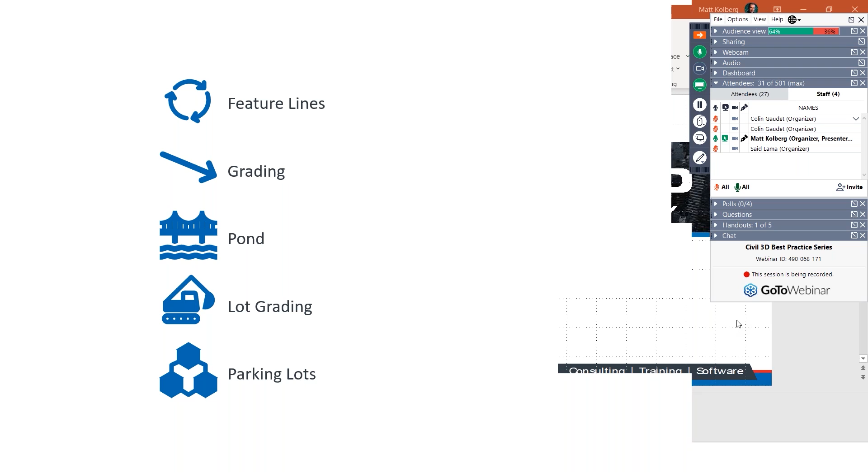All right, here we go. Come on, there we are. All right, we're already off to a poll here. We haven't even talked about anything yet, and we already have a poll. So you're going to see on your screen any second a question. Let me pick one here. Question is going to be, how much of your work is focused on grading, essentially? You'll see a bunch of options. All right, so I'll launch the poll now. So I just wanted to say, roughly how much your work is spent focused on grading tools, 0 to 20%, 20 to 40, you see the options. Just curious, how much grading do you do?

Give you a few seconds to finish up here. We have almost 50% of you have voted already. It's just about a tie between the second and third option. All right, 10 more seconds. Myself, when I was in production, I was probably in the 20 to 30% range as well. All right, 2/3 of you have voted, so a few more seconds.

Now, the first thing, I'm just going to get this right out of the way. Grading sort of has a bad rap with Civil 3D. If you go to the discussion group forum and you ask which Civil 3D tool is the least stable, you're going to get an overwhelming response: grading. Now, I don't want to say that it's unstable, but if you had to pick one, it's the one with the most potential for instability. Now, there's a couple things you can do to greatly increase your chances with grading.

And by the way, a lot of the bad rap from grading is from history. Back before 2010, yeah, grading was fairly unstable at times. It's improved immensely since then. And so a lot of the respondents to a question that you might ask in the discussion groups are the people who remember back then.

My friend Tish, her entire job is grading, and she almost never has a problem. So what does that tell you? Well, maybe she's not using the tools the way other people use the tools, or maybe she's using them in the best practices way. Anyway, there's things that you can do to increase your chances, and these two are the top two. Simplify your feature lines.

Now, what you're looking at, the dimension that says 21 meters, right? Look at the blue feature line underneath. Look how many vertices it has. I don't know how many there are. It's, I don't know, 1,000 vertices within 20 meters, and that's just way too much. We need to simplify those feature lines.

Okay, editing tools. The top left image there, that's all the editing tools we have. Typically what you want to do first, I'll switch over to Civil 3D here. So it's not PowerPoint death here. Let's try, come on. There we are.

Feature lines are the start of every grading scenario. In fact, a lot of grading scenarios don't even use the grading tools themselves. They don't use the criteria. Sometimes, maybe parking lots, it's just all about multiple feature lines, and there's your design.

There's two sort of buckets of editing tools that we place for feature lines. And typically you want to edit the geometry first. We want to edit the plan shape of this entity. That's almost always number one. Elevations almost always come after. I've got this sort of organic shape here, this blue feature line. If I want to make that a different shape, get rid of a PI or get rid of a curve or add a new PI.

All the geometry editing tools are right here. So I'm just going to do a couple really quick. Get rid of a point of intersection. Like that. Maybe I want to add a new point of intersection, such as this. Break, trim, join, right? AutoCAD has those tools, but AutoCAD doesn't know how to deal with feature lines. So you can't use the AutoCAD break, trim, and join tools. You have to use these tools.

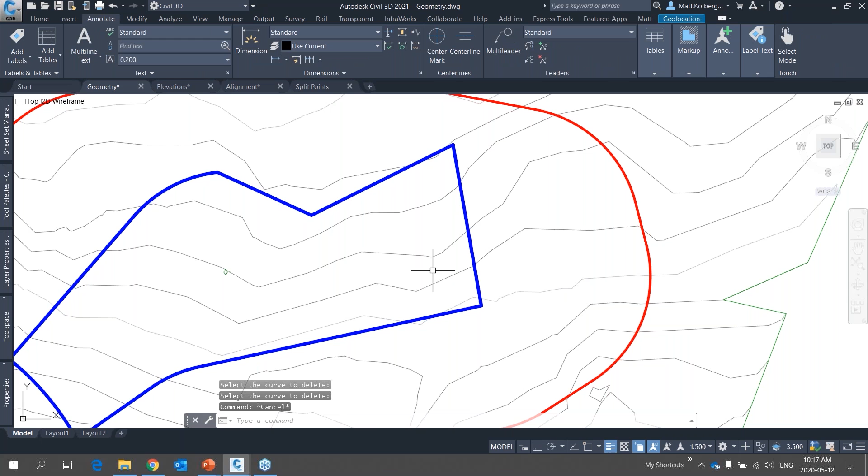And what they don't see is this. So they get the right button. They get the button to edit the curve, but they don't see that. So that delete, it's not trimming out that piece. It's just getting rid of the curve, and it makes it into a 90-degree angle, or close to 90 degrees in this case. So that's your tip of the day. That's how you get rid of a curve in a feature line.

So we start with the geometric editing tools. Get it the right shape. And then once it's the right shape, then we worry about the elevation tools. And then there's lots. The elevation editor is this sort of vista where you can highlight any number of points and apply their elevations all at once or individually with your mouse. You can use these tools to grade ahead or grade back. So if I want to hold this one vertex, I want to go at 5% in that direction, I can make that happen.

By the way, this is a new tool, newish. 2018, I think this tool was released. You can associate your feature line elevations to a surface, and you can make it dynamic. Right now, nothing's actually going on, but you can basically drape your feature line on a surface, but you don't have to drape it perfectly. You can have it floating above or below.

It's a relative elevation. A relative elevation of 0 drapes it perfectly on your surface. But a relative elevation of 1, your feature line is hovering 1 meter above the assigned surface, and when the assigned surface is edited, your feature line is edited. So that's a newish tool.

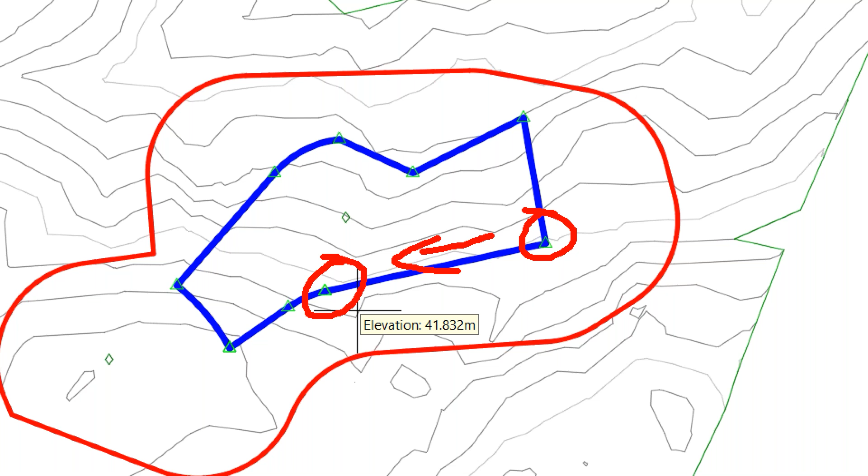And so what the software does is it holds this elevation, it applies the grade that I specify, and it calculates what elevation, and it sets the elevation to that next vertex. So step number 1, adjust your geometry. Step number 2, adjust your elevations.

Now, just for fun, what you're looking at are a bunch of PIs, points of intersection, the square grips. Some users get confused, what's an elevation point? And so what I'm going to do is I'll quickly run this tool. And I'll put elevation points at an increment of 5. Right, what I've done is I've just increased the density of this feature line. We have the square grips, which are the original PIs, and we have the round grips, which are the new

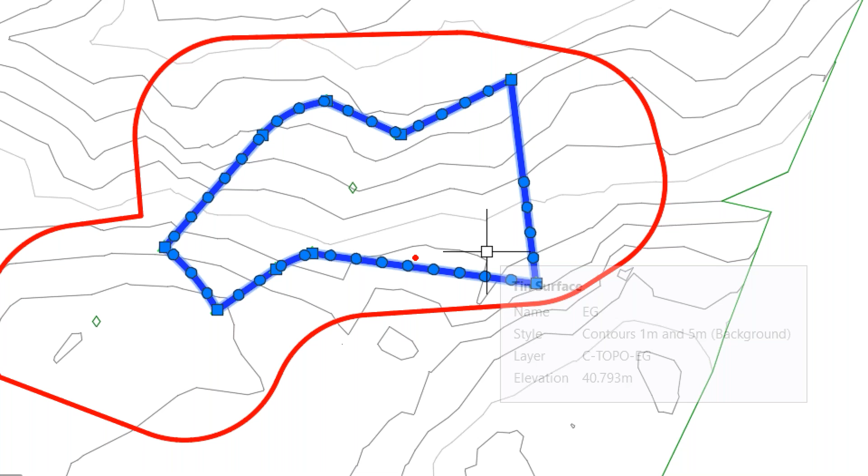elevation points. Now think of them as vertical PIs, because when I take this actual PI, it doesn't behave like one might expect a normal PI to behave like. Okay, these are only PIs in the vertical sense. And so that's what elevation points are. So I'm going to delete them with this tool. I want to get rid of all of them. And now we're back to having just the regular everyday PIs.

And so that's sort of best practices for feature lines, because feature lines are the lifeblood of all of your grading. You can't do anything without feature lines. Edit the geometry, edit the elevations, and then you can start moving on to other grading things. If you need to use criteria, yes, but you don't always have to use criteria, right? You can make surfaces directly from feature lines, and we'll talk about that in a little bit.

This one, I've created a feature line from an alignment. Now, if you watched a previous webinar, I think 2 weeks ago, or 3 weeks ago, the alignment webinar, I talked about this briefly, and I'll talk about it again because I like it. It's not always the right thing to do to create a feature line using the feature line tools. Sometimes it makes sense. Sometimes it's easier to use an alignment and a profile. And that's what I have. I've got alignment right here. I have the blue design profile right here.

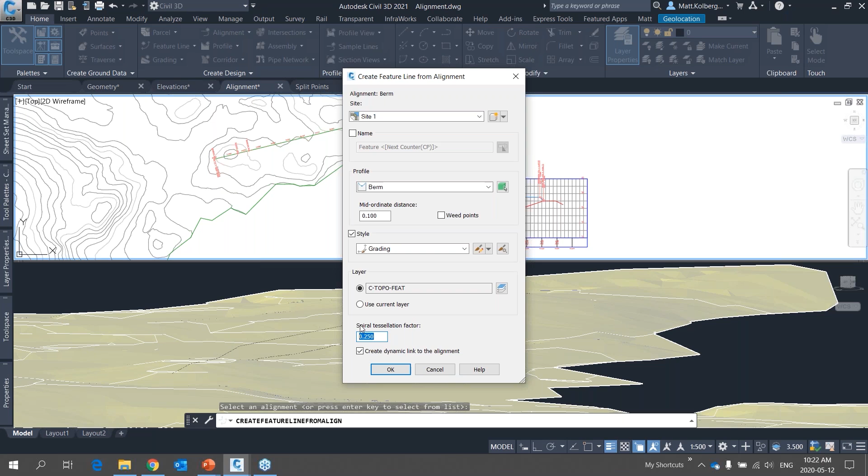And I want to make a berm, and I need to use the grading tools maybe to make this berm. I need a feature line for that. So I'll quickly go feature line from alignment. There's only one. Now that alignment has 2 profiles, the existing ground and the design, so I'm going to use the design. Mid-ordinate distance will help me if I have any vertical curves, because a feature line cannot contain vertical curves. This tessellates our vertical curves. I'll choose a style. There's spiral tessellation because feature lines can't do spirals either, so they have to get tessellated. And then finally, I want it to be a dynamic link.

And there we have a 3-dimensional feature line. Any change I make to the alignment and or profile, that feature line will update itself. If I choose to use criteria or a stepped offset, yeah, it's a feature line, so those things will work perfectly. If you like to use alignments and profiles instead of trying to use maybe the elevation editor to edit your feature line, use alignments and profiles. Sometimes it just makes sense.

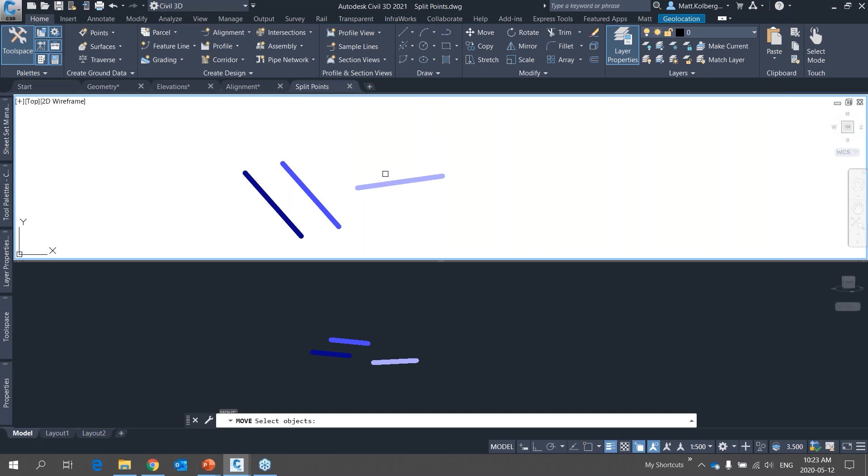Now this one, it's called split points. Probably best that I just demonstrate this instead of talking about it. Here we have 3 feature lines, different elevations, right? The top is a 2-dimensional view, the bottom is a 3D view. The lighter color one is elevation 0, the darkest one is elevation 5, and that one's elevation 10. And currently they don't cross. Watch what happens when they cross. So I'll move the lighter colored one so that it in fact crosses both of the other ones. Keep your eyes on the bottom half of my screen.

What just happened? Well, these 3 feature lines are on the same site. When you have feature lines on the same site and they cross or they touch in some way, right, endpoint to endpoint even, they must share that vertex elevation. Now you might think, well, that's not good. It is actually. It's Civil 3D's safety feature. See, feature lines are there to create surfaces. Now, some users use them for other things, and that's fine.

But the idea behind feature lines is they're going to be used as break lines, 3-dimensional break lines, to make surfaces. And so you can't have it where one feature line is hovering well above another one and still use them as break lines. There's differing elevations where they cross. That can't happen in a TIN surface. So when you have feature lines that cross, they must share a vertex, and that's what's going on. Now, the darker blue lines lowered themselves to match the lighter blue line, because the lighter blue line is the last one that was edited. Watch what happens. I'm going to move this one just a little bit to the right.

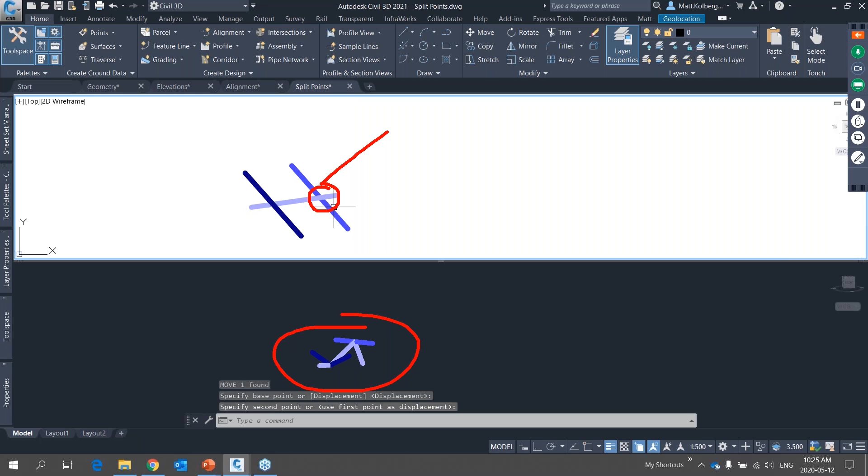Now that may or may not work for you, but there's a way that not everybody knows to force one or the other to be the controlling entity. So my plan here, I would like to force this one to be the controlling entity of all 3. And you can do that with styles. So first I'm going to assign styles to this. Now, you know what? Before I do that, I'm going to show you where this can actually be used.

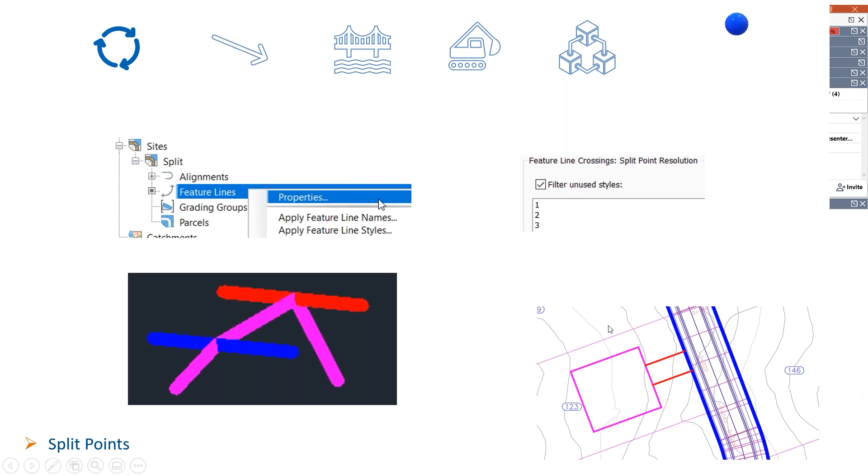At the bottom right image, this is a corridor on the right side. The big, thick blue lines from the corridor, those are corridor feature lines extracted to be dynamic feature lines. The magenta rectangle is a building pad, so that's where the home goes, of course. The red, which I'll circle in blue here, those 2 red feature lines, it's a driveway.

Now, quite often, that building pad needs to stay at some elevation. And also, quite often, the corridor is modified and its elevations move up or down. So the red driveway sort of needs to float in between. And so because they're feature lines and the last one that was edited wins, you're not always guaranteed that the driveway would be this floating entity between them. So this is where you need to use the split point resolution feature I'm about to show you.

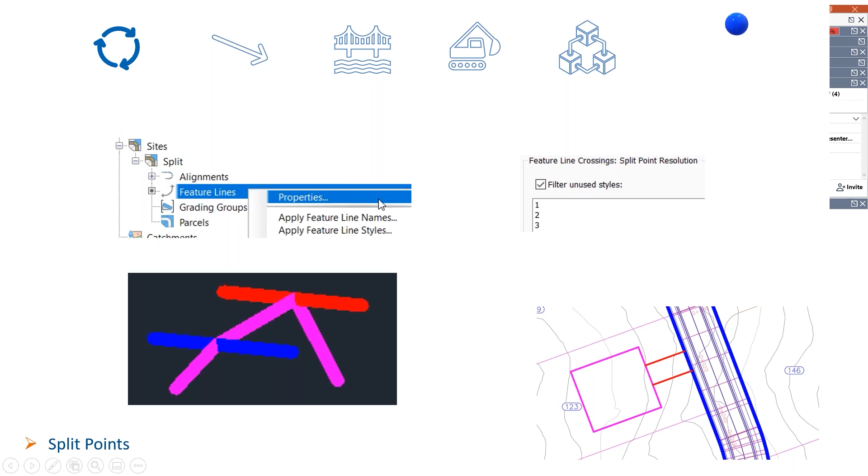It's all about styles. Well, that's half about styles, and the other half is it's like a hierarchy. So let me set the styles first. I'm going to set that to style 1. All right, already good things have happened. You can see down here, the red thing is actually controlling. All right, I'll take this one and I'll make it style 2.

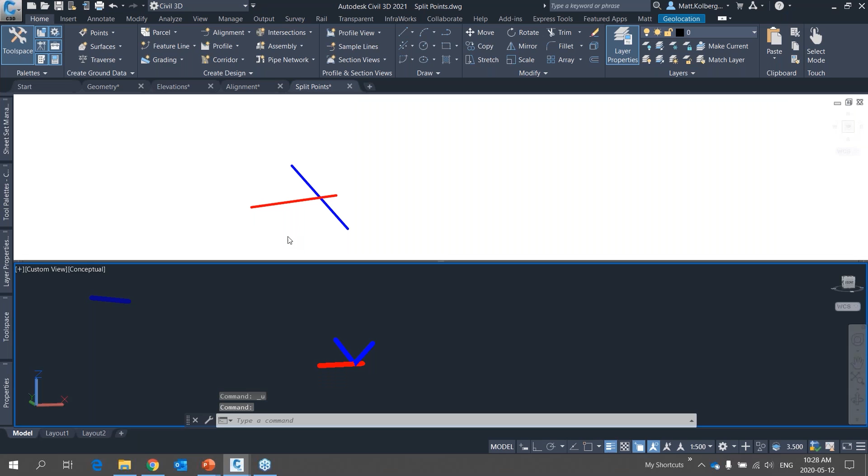Finally, oops, what did I just do? All right, let's try that again. I think I accidentally dragged it somewhere. All right, let's make this style 3. All right, there we are. So what just happened? How did I use styles to affect how this works?

So what I'll do now, just to prove to you this is actually going on, I'll move this one. Last time I moved one of these, the red feature line adjusted. And I'll move this one too. Last time I moved this, the red feature line adjusted. Now it's not. The red feature line is the controlling one now. I'm moving these other ones all I want, but the red one is still the controlling one. Different behavior than what you saw 2 minutes ago. How did that happen?

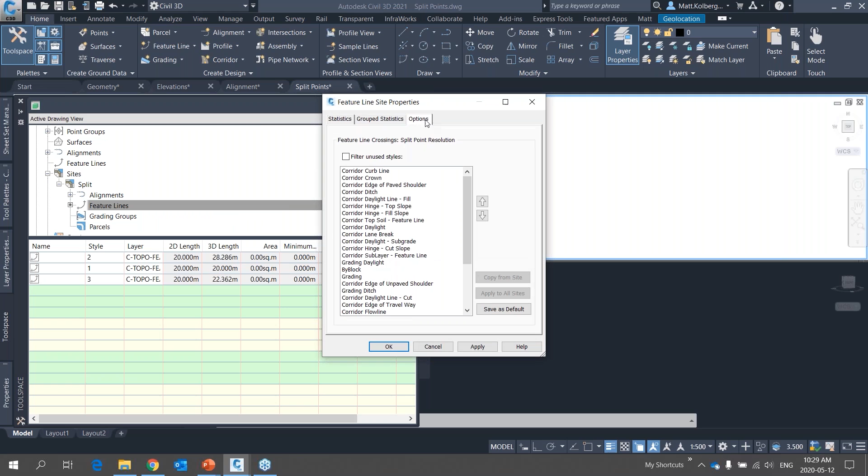With my site, I go to feature lines collection, I go to properties. And there's options here. This is your feature line style hierarchy. It's for split point resolution. Any feature line that's using the style that's on the top of this list will be the controlling feature line, and then the second one and then the third one. So whichever feature line controls is completely controlled by this hierarchy.

So that's a feature that not a lot of my customers know and fewer of them use. But when you're doing a subdivision with your driveways, the driveways would be at level 3. The corridor and the building pad would probably be at level 1, so they always control. And that is split point resolution.

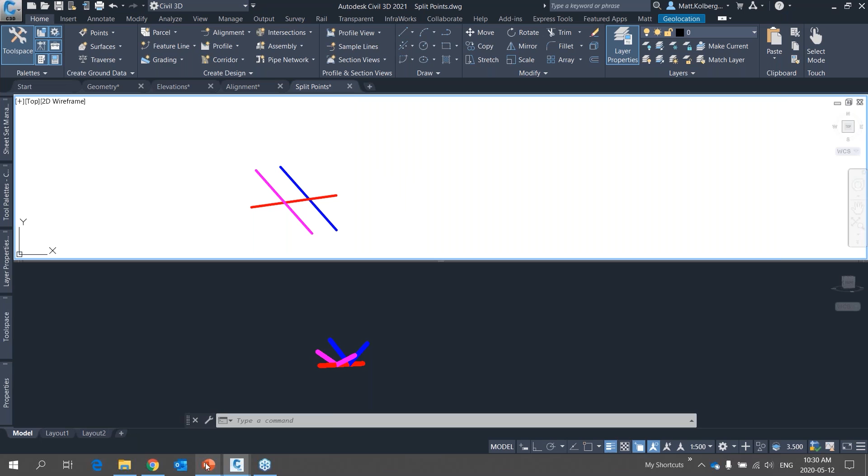All right, grading. This one really, I want to talk about the criteria. So let me close some of my drawings.

While I'm closing the drawings, there's really only 4 different ways to grade in Civil 3D. 4 different targets. You can grade to a surface; that's target number 1. You can grade to a known elevation; that's number 2. You can grade to a relative elevation; that's number 3. And then number 4 is you can grade for a width or a distance. That's it. There's only 4 ways to grade in Civil 3D.

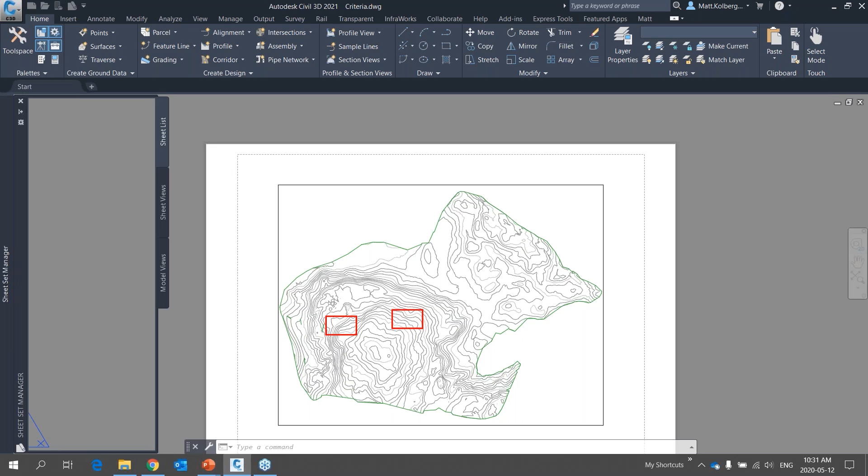Now, we do have the option to create multiple criteria. These grading options are criteria. There's 4 different criteria. You can create any number of criteria that you want, but you might say, well, why would I want to create more than 4? Because there's only 4 criteria. Why do I need more than 4? It depends on what options you want to give the user.

So I'm going to grade both of these things in a similar way, but I'm going to use 2 different tools. Excuse me. All right, grading, I'm going to grade to surface. There you go. I'll pick this left one first and watch the command line. It's going to ask me a bunch of questions.

Select the side, entire length. What's the format? Is it grade or slope? What is the cut slope? And what's the format for fill, grade or slope? And then what's the fill slope? So it asked me a bunch of questions to get that done. And that's fine. It didn't take very long.

The other option, let's say I'll use one that's called Ditch Foreslope or 5:1 to surface. I'll use this one. And I'll grade this other side. And that's it, it's done. It did not ask me those questions. And really, that's the difference between having just the 4 basic criteria, where you get the software to ask the user all of the questions. You can create a criteria where it doesn't ask them anything.

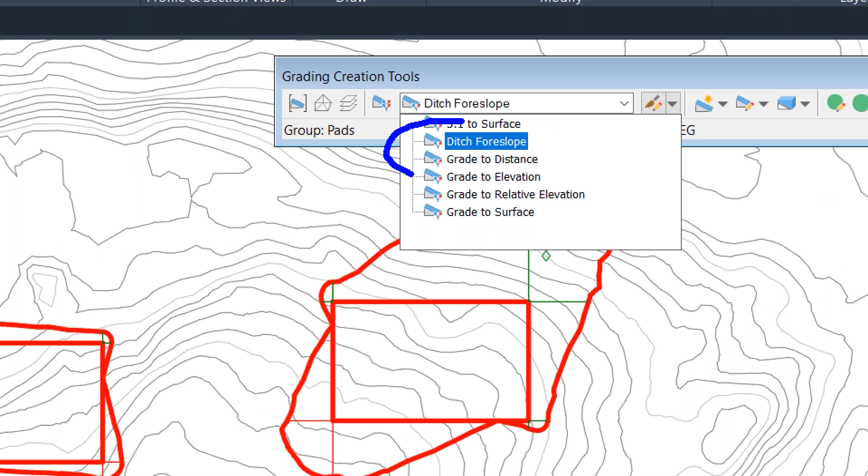You, as the Civil 3D template creator, let's say, can create something even like this. You just give it a name. Me as the designer, I don't have to know what slope to use. This is our standard Ditch Foreslope. I don't care that it's 3:1 or 5:1. This is our standard. Just do it. I don't need to answer the question. And so that's your choice.

When you create your Civil 3D template, do you want the user to be prompted for those questions or not? Do you want to create some grading that's named appropriately where they don't even have to know what the values are? That's up to you. How do we get to this? Well, when you create the criteria, it's just a matter of locking whichever options you wish.

Now, is this best practice? I'm not going to say yes or no. It's about your choice. Personally, every grading scenario is pretty different, and so in my drawings, I just have the 4 criteria. I want to be prompted for all these options. But for my friend Tish, she's got a certain scenario she does over and over again, and she doesn't want to be prompted for those questions because it takes too much time. And so for her, she's locked a lot of these things. So it's not best practice. It's about what's best for you in that case.

All right, another grading option that's really quite useful. You don't always have to use grading criteria, like I said earlier. Sometimes it's just a bunch of feature lines that are added to a surface. But you've got options on how you want to add those to a surface. So let me open this infill file. You've probably heard of the infill tool.

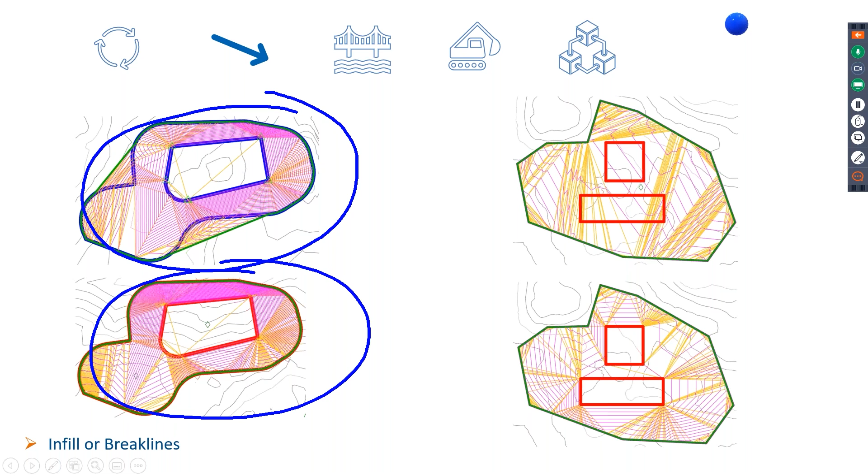This one, I have 2 feature lines. I right-clicked them and I chose Add to Surface as Breakline. This one I didn't. All I did with the bottom one is I used the infill tool. Let me show you that. All right, here we go.

All right, I think, what is it, 10:35 now? Just before I demonstrate this, I'm gonna get Colin or Jay to unmute your mics and let me know if there's 1 or 2 cool questions you want the rest of the group to know. We haven't gotten anything specifically grading related. One question on kind of the best sub-assemblies to use with ditches, but we'll stay focused on the grading stuff for today. Okay, good. Thank you very much. Yep.

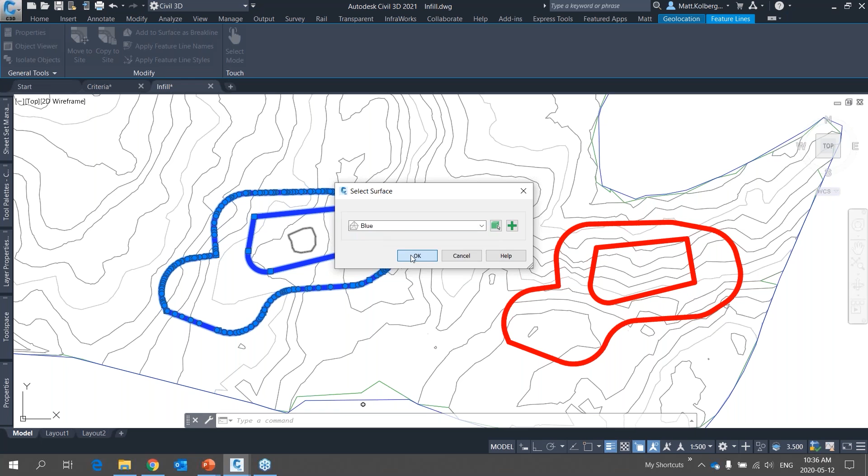All right, so 2 ways I can add the red and the blue feature lines to a new surface. So one way is I'll just pick these 2. And I've already applied appropriate elevations to them. And so I'll right click and I'll say Add to Surface as Breakline. And I'll pick one. That would be the blue. It's a standard break line because they're 3D. And there we are. I now have a surface made from those 2 feature lines.

Now I do have to assign a boundary because you can see the triangulation going outside. I'm not going to do that because I'll just move on to the red. But when you add break lines to a surface that way, you will typically have a boundary issue. Is that a problem? Not really. But here, I'm going to do this a different way.

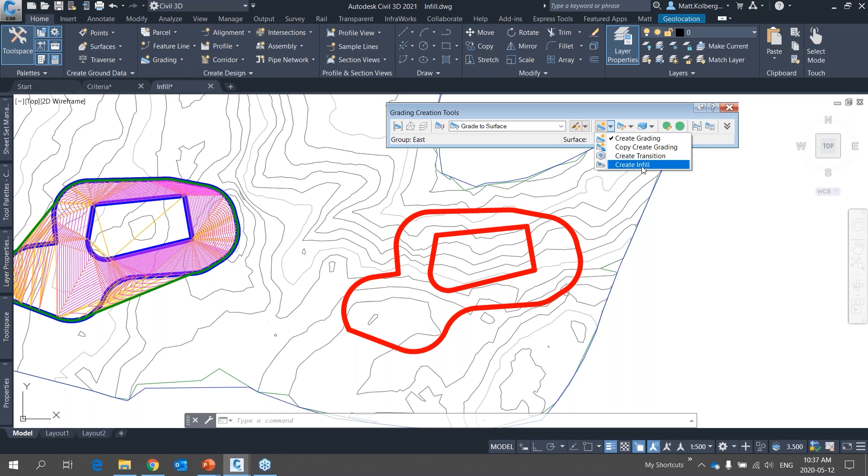Now, I need to set my site properly. And I'm not actually going to use the criteria because, well, I've already got my design done. I've got 2 feature lines that I want to add to a surface. All I need to do at this point is use the infill tool. Twice. There's once and then twice.

So I've made another surface using what is essentially the same feature lines, but all I did was use the infill tool. Notice I don't have a boundary problem anymore. That's the biggest difference with making surfaces from break lines like I did on the left, or making surfaces using the infill tool. Now, the infill tool is useful when you have closed regions.

You have areas that are enclosed completely by 1 or more than 1 feature lines. It doesn't even have to be a closed feature line. I could have 3 feature lines, 1, 2, 3, I can use the infill tool right there. So it doesn't have to be a single feature line that's closed. Any closed area that is encompassed by any number of feature lines.

Is one better than the other necessarily? Well, I don't know. I don't have to deal with a boundary here. Other than that, the TIN lines are very similar. So really it's just a boundary problem. Should you use it? That's up to you. I like to use the infill tool. I'm going to show you some more options later. In fact, right here.

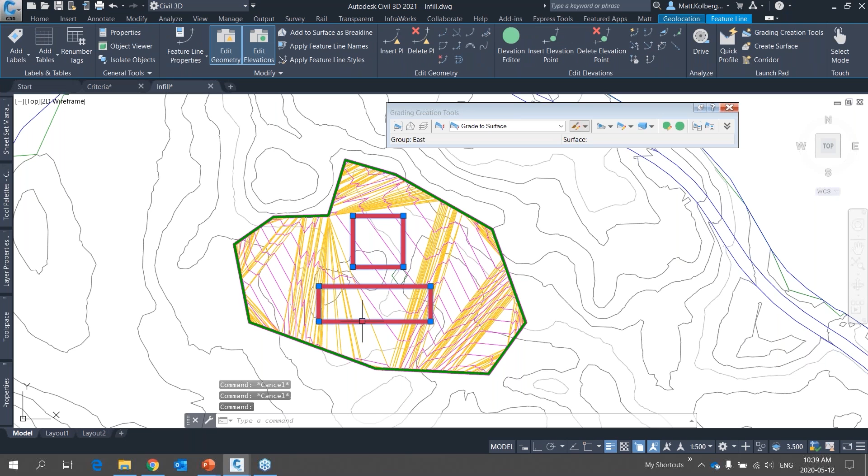This one, I have a surface and an infill tool, right? There's the green feature line around the outside. There's already an infill tool there. These two red feature lines are currently not on the same site. I do need to figure out what site those things are on. North, okay. The red feature lines, I'll select them both. They are on the none site currently.

The elevations of them have been applied appropriately, and all I need to do is move them to the north site. And because there's already an infill object right inside here, those new red feature lines will become part of my surface automatically, just by moving them to a site. Now I do have to rebuild the surface.

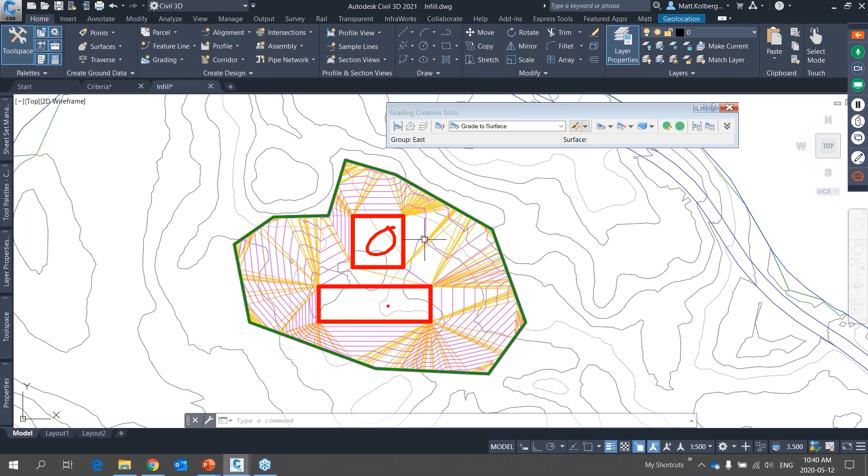There. So simply by adding feature lines within an infill, they automatically become part of the surface, part of the grading group. Now I do need to add another couple of infills in here to finish it off, but that's essentially how the infill tool works. Later on, we'll talk about some parking lot tools where this is actually going to be quite useful.

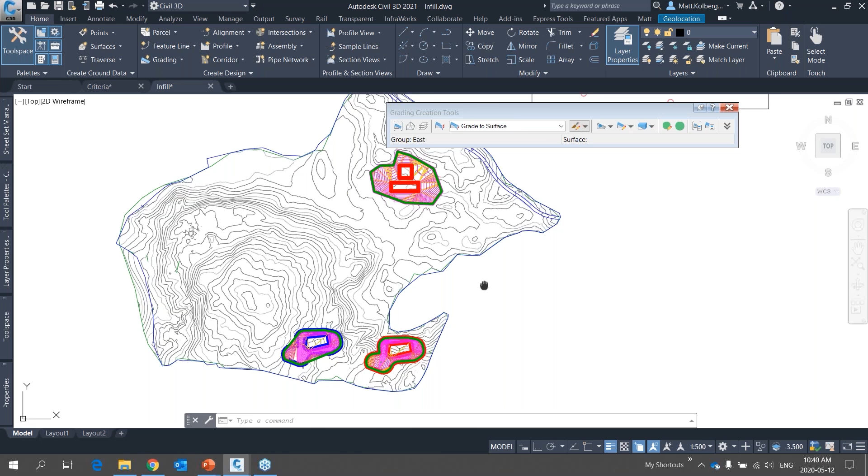So to wrap up this section, infill, whenever you have a region that's enclosed completely by one or more feature lines. And when you already have an infill, any new feature lines will become part of that surface as long as you rebuild that surface.

All right, this brings me to my next poll. Question is, when you add feature lines to a surface, do you think you could make use of this infill tool maybe instead of Add to Surface as Breakline, or if you already use it? I'm curious, do you use this infill all the time? Sometimes, not at all? Now, the results for this poll might be a little misleading because maybe you don't do grading. And so you're going to say not at all, possibly.

All right, we've got about 1/3 of people have voted so far. I'll give you a few more seconds.

I will give you a bit of advice while we're waiting. As you use the infill tool and as you add break lines, occasionally you're going to see that the place where you've added that infill tool just sort of goes away and you have to re-add it. I've seen that before. It's not particularly uncommon. As you're making changes to your grading scenario, sometimes the infills just go away. And so you have to be a little studious.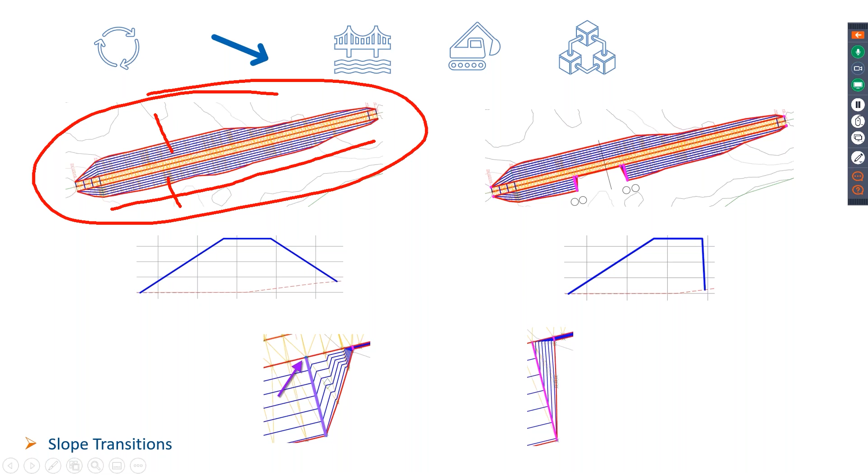Slope transitions. In this scenario, I made this berm with, let's say, 2-to-1 slope both sides for the entire length of the feature line, right? When you perform grading, the command line, one question is, do you want to apply this to the entire length? You've probably seen that if you've done any kind of grading. You'd probably say yes. And maybe yes is the right answer today, but maybe tomorrow there's something that we didn't see here, and you need to create a retaining wall or something, some other kind of slope. Right?

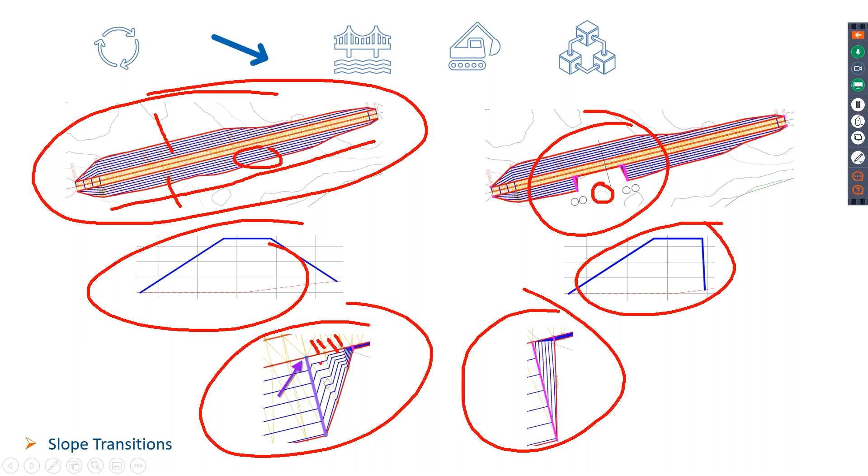This is absolutely possible. You do not have to delete this grading and start over, although sometimes it makes sense to do so. You can definitely create a slope transition after the fact. So that's what we had. That's what we want. Now the image at the bottom, very typical. When you do slope transitions, the contours in the area of the transition almost always look funky like this. But that can be fixed simply by deleting some extra TIN points within there. That's all I did. So yes, sometimes the contours are funky, but they can be fixed by manually adjusting your surface TIN model.

All right, how do we make that happen? It's about creating transition regions. Because I have a single grading object that is, let's say, 2-to-1 for the entire length, what I need to add is 4 regions. One region where it stops becoming 2-to-1, one region where it starts becoming 1-to-1, another region where it stops becoming 1-to-1, and another region where it goes back to 2-to-1. Basically, at these circles, you're going to see 4 different transition regions. Okay, so let's see if I can make this happen.

So the tool is right here, create a transition. And you can use this within an existing grading object. So which feature line do I want to create a transition for? It's that one. And then where's my start point? I'm going to pick the center of this circle. And it's going to ask me some questions. I'm just going to keep it 3-to-1 for now. And I'm still in the create transition tool. So I'll continue and add all 4 of my transitions. So I'll try to go through this really quickly.

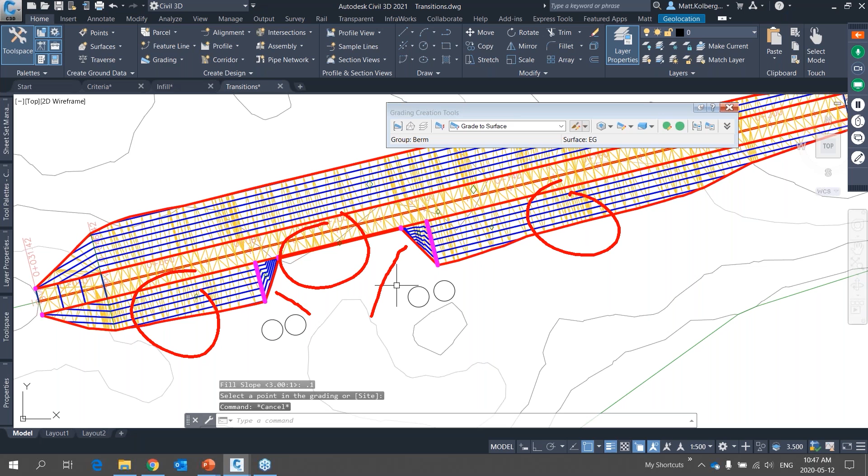Now, last thing is, well, what if this transition is too far? I want them to be a little closer together. No problem. I'll grab this magenta thick line. There's a grip right at the end of it, which might be hard for you to see, but it's there. And I can use that grip and drag that region to wherever I want it to be. Now, I see a problem with my TIN, so that's going to be me making edits to the TIN to fix that. But that's how you can use transition regions.

Would it have been easier just to get rid of this and do 3 or 4 more new grading objects? Probably not. But you know what? If that's what you're more comfortable with, that's fantastic.

How's our time? Swimmingly.

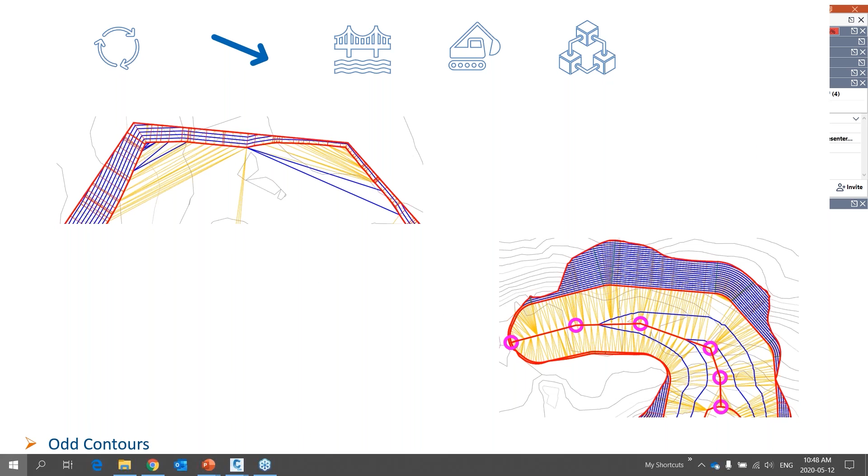Okay, here's your tip, a couple of tips of the day. Here's the scenario. I've got a flat top, let's say building pad. This right here is all elevation, I don't know, 38, 40, whatever the elevation is. And we're sloping up or down to a surface or something else. That is a contour, as is this.

Thing is, this is all elevation 38. So Civil 3D is having trouble figuring out, because it's all elevation 38 or 40 or some known elevation, where does it draw the contour? Now, you and I know that it should draw it exactly on the outside, but the software doesn't always know. Because it's all elevation 38, where does it draw the 38 elevation?

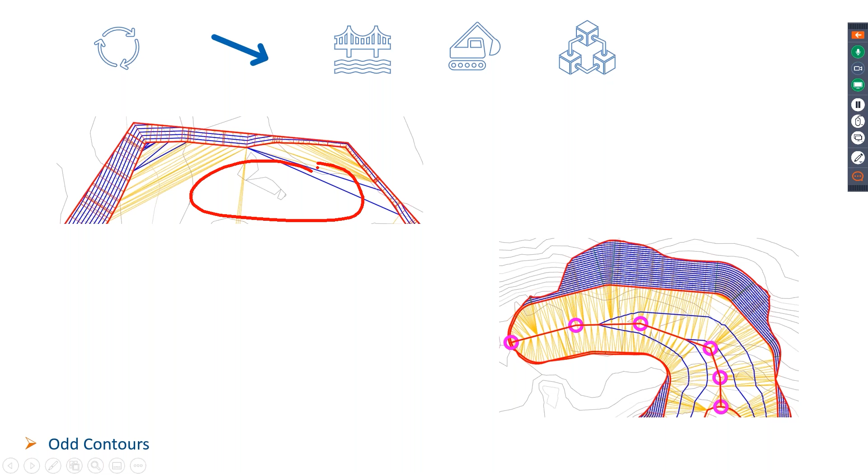All right, so I'll open that drawing and I will tell you how to fix it. Now, it is a workaround. Elevation 38 or 40 or whatever the number is, it's not going to be elevation 40 anymore. It's going to be elevation 40.0001 or 001, depending on the precision of your labels. Long and short of it is, I can't make it exactly 40. I think that's my elevation here.

Let me just double check. Yeah, so elevation 40, contours are going all over the place. I need to make it a different elevation. So quickly, I will edit my side slope grading because it grades from a red feature line up to elevation 40, but I'm going to make it 40.001. As long as my spot elevations aren't to the millimeter, it's just going to show as 40.0.

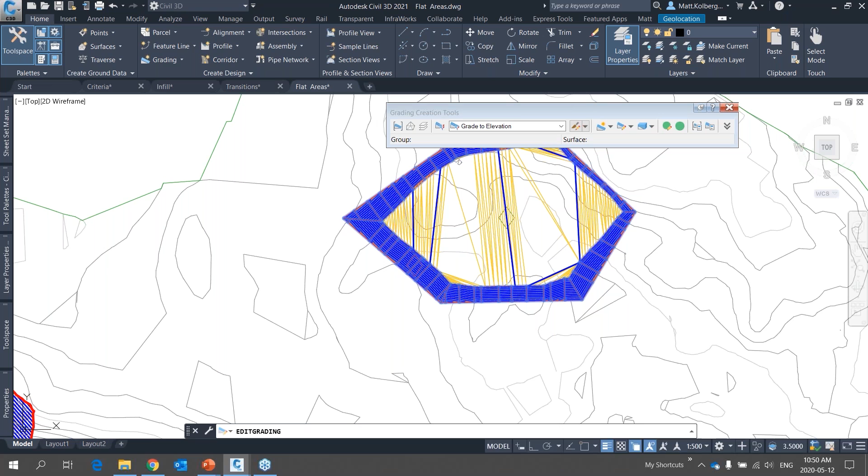So while true, it isn't exactly 40. When I'm done, there's no more rogue contours. Right? The 40 contour is right there. Now I do have the tiniest gap in here. Is that going to affect anything? No. 1 millimeter, it's not going to affect my volumes.

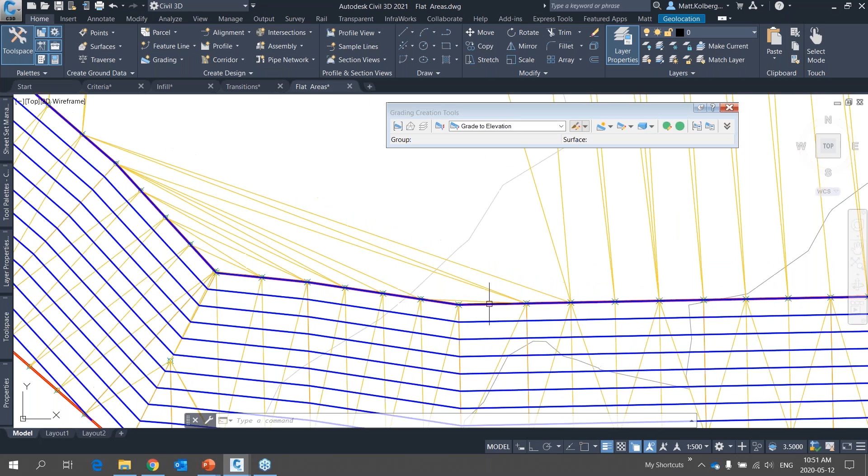In this case, if it was 47 hectares, maybe it would, and maybe I'd have to go to the tenth of a millimeter. If I had spot elevations to the millimeter, I would have to round those down somehow, or I'd have to go to the tenth of a millimeter here too. But that's your choice. If I want to get rid of those contours, I do need to make this 40 point just a bit higher, or lower if you're grading down to this elevation.

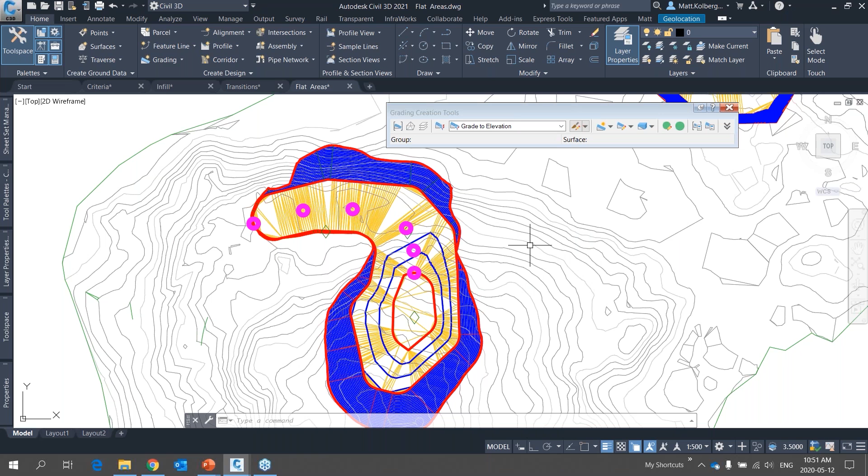Here's another scenario where it's not doing exactly what we want. Now, it might not be obvious to you. We have a red feature line here that's all one elevation. This red feature line is higher, right? You can see the contours going up to it, and so that makes sense. But look at the TIN model. It's going back and forth between the 40 meter feature line. What I want is a nice even slope. This is a high point right here. I want the contours to go from that high point down to there.

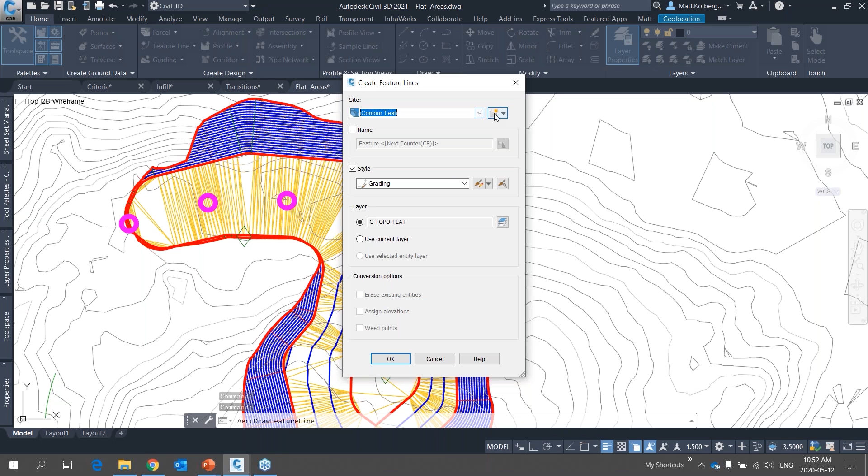What you need to do is have a brand new feature line that connects this feature line along your intended path down to this feature line. I need a brand new feature line. What does this do? Really, it forces the surface, it forces the contours to do what we want. So, brand new feature line. Contour test, I think. Good.

Now I'm going to start at the center of the circle. The elevation of that feature line is 42.5, so I'll accept that. Next point, the next center of the circle. What's the elevation there? I have no idea. So I'm going to use the transition option. In fact, I'll use the transition option all the way until I get to this circle where I know the actual elevation. So I'll T for transition because I don't know the elevation yet.

Next, center of this circle. Elevation, no idea, transition. Center of this circle, transition. Center of that circle, transition. And then finally, center of this circle, now I do know the elevation, it's 44. Enter. So it's creating the new feature line with the elevations transitioning from one elevation to the next.

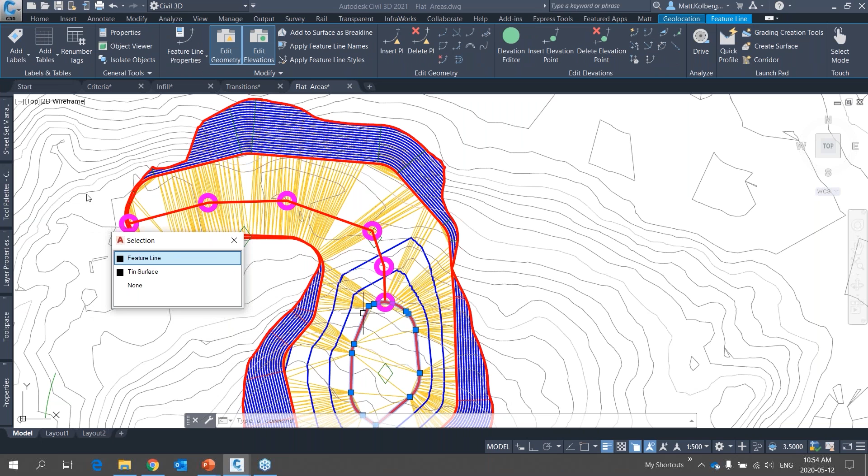And because it's going on the same site, it will affect the surface. Now I just need to make sure, do I need to rebuild the surface, or maybe I added it to the wrong site? Let's find out. Oh, maybe I added it to the wrong site. Of course I did. Wrong site, no problem. I'll just grab it. Move to site. Cross your fingers. Rebuild that surface.

There we are. Okay. So now you can see the contours are in fact following that red brand new feature line exactly the way I wanted it. And so to sum up, sometimes you need to sort of create this transition feature line to get the surface to drain in the direction you want.

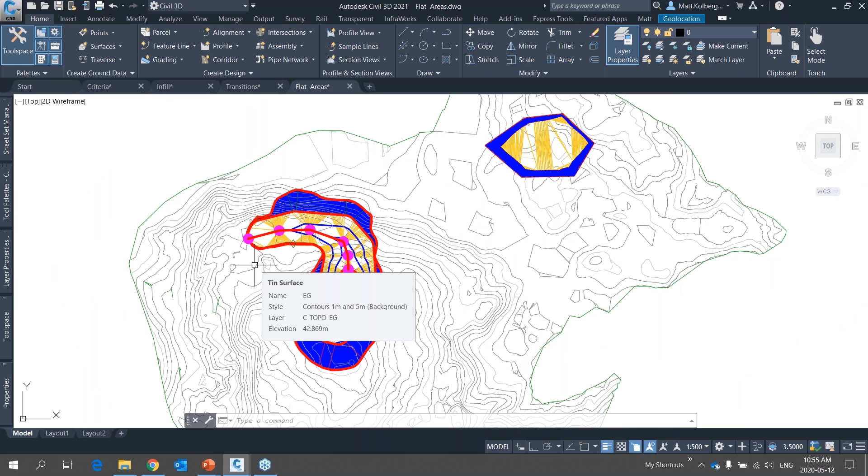You probably noticed so far that the topics today, it's almost more of tips and tricks and some best practices. Now, as we're developing the agenda for this class, we're just coming up with some ideas, and there are some best practices with grading. To get the most success, it's really just about using it properly and for your intended design, right? Because grading scenarios are so different. It's hard to just show exact best practices for everything. So we sort of turned this into a lot of tips and tricks, and so that's definitely one of them.

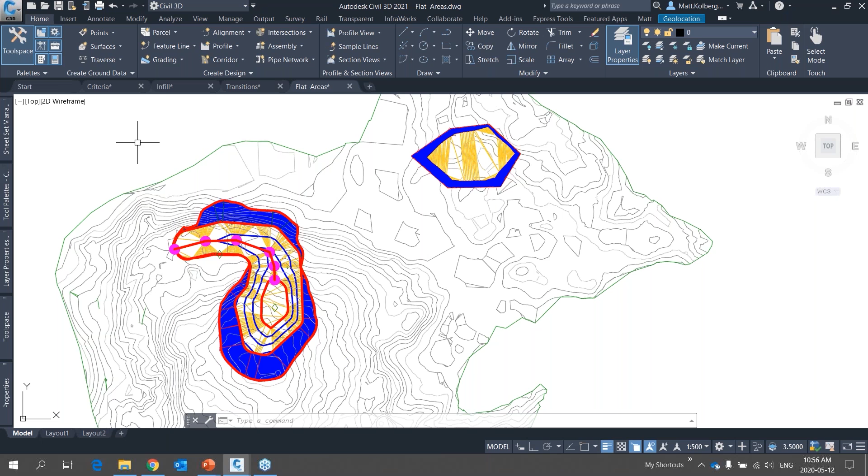Okay, this section's on ponds. We're going to start with grading a feature line at 0%. So the deal here is we've started with a feature line on the outside, and we're using the grading tools to grade to the inside at a certain distance at a grade of 0%. Civil 3D hates grading at 0%. How do we know this? Well, I know it because I've done it a lot.

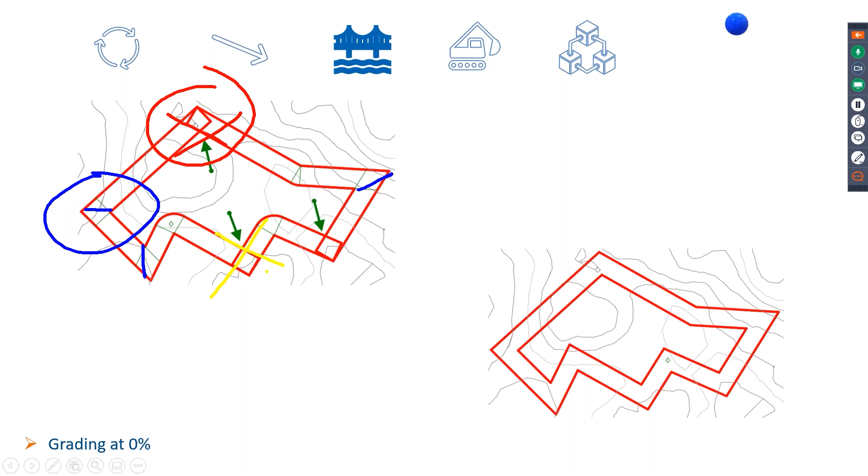How do we know that something bad has happened? Well, that is what a corner should look like. Quite often, you'll actually see a single sort of mitered line at the corner. But definitely, when you see something like that, these two feature lines are crossing one another. I got all sorts of colors going on here. Feature lines are crossing each other. That is bad. If you do not stop this in its tracks, you're going to have problems with grading later. So let me close my drawings here.

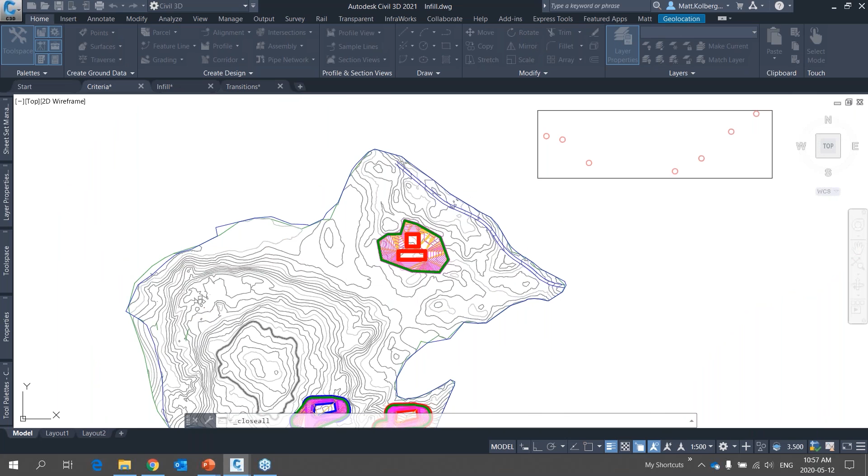So what do you do? We need to grade, let's say for a certain distance at 0%, and then we run into that problem. What do we do? There's a couple of options. You can certainly grade at, instead of 0%, maybe 0.1% or 0.001%. That's an option. If you're only grading 2 or 3 meters wide, 0.1% is not really going to make a noticeable difference in anything, including elevations. But if you have to grade 30 or 40 meters wide at 0%, then it definitely could be a problem.

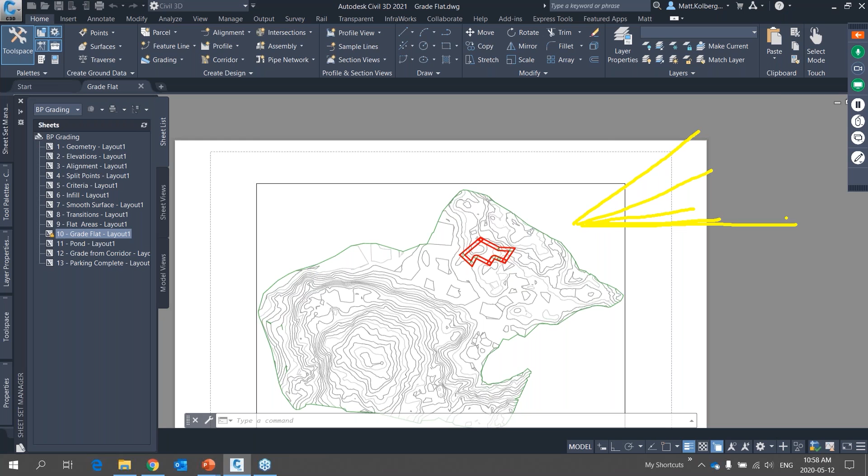There's another option to grade, right? When you grade, you're specifying grade or slope, right? Grade is 0% for flat. Well, what's the slope for 0%? Most people say, I'm not sure. Well, think about it. That is 1-to-1, right? 45 degrees. That's 2-to-1. That's 10-to-1. That's 1,000-to-1. So what is flat? 1,000,000-to-1? Well, it's still not perfectly flat, right? Basically, there's nothing in Civil 3D where you can type a number to slope flat. But there is a trick.

So in this case, I've graded at a 0% grade, and it's giving me a problem. So one thing that you can try is using a slope. But Matt, you said there's no number that will slope flat. Well, what we do is I specify slope. You'll see in a minute. Let's see, distance 10, slope. Check it out. You can actually type the word horizontal.

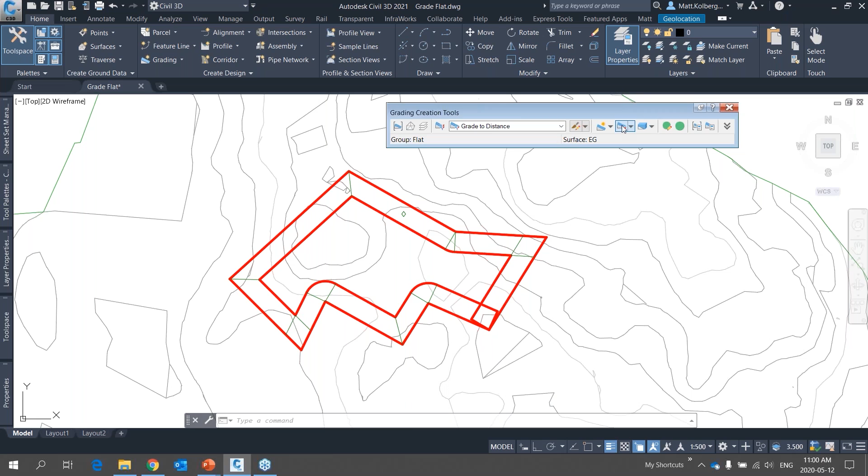So this is actually better than the other one, right? Check it out. I've got the mitered corners. Those are awesome, but not there. So it's still not perfect. So 0% was bad. Horizontal slope was better. Now, ask me why. I have no idea. Why is 0% worse than a horizontal slope? Don't know. But in this case, it's still not working. What do we do? I can't have anything cross itself.

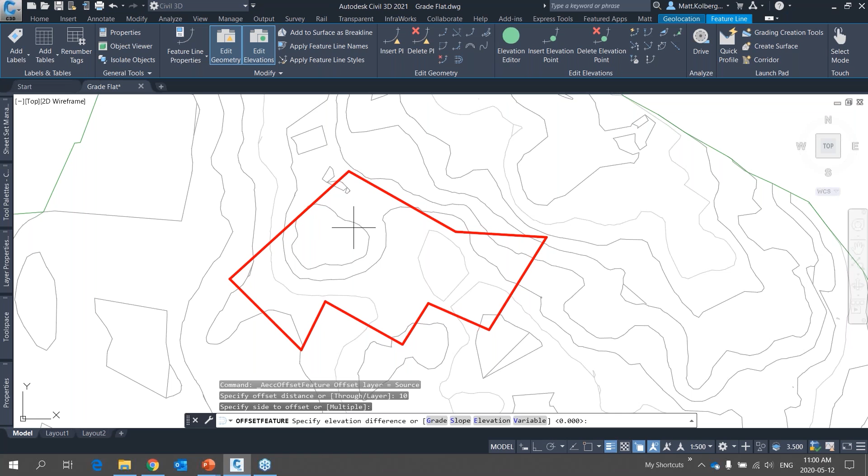That's bad. So my last resort in this case is really just to use the stepped offset tool. Because I know that it's a 10-meter offset. I know the elevation difference is 0. So I can just use the stepped offset. Offset 10, side to offset. Elevation difference is 0. But of course, there's no grading object inside there. There's no surface. So now what?

Well, that's when we can use our infill tool, because we have an area enclosed by multiple feature lines. There. It's hard for you to see, but right there is my infill. And when I go to make a surface, that will be part of the surface. So when you're grading flat, try it. Grade at 0%. If that doesn't work, try 0.01. If that doesn't work, try horizontal slope. If that doesn't work, use the stepped offset.

Now, I think I have another poll. Okay, last poll of the day. What is your success rate of grading at 0%? And this poll should accommodate everybody because there's an option that says I don't grade at 0%. So what is your success rate? When you grade at 0%, does it work? Do you get the funky feature lines that cross each other?

Wow. So far, I'm a little bit surprised. We've got almost half the people who voted, and a lot of them said, I don't grade at 0%. A lot of them are 100%. Oh, we're getting more people.

Now it's 11 my time, of course. Colin, any interesting questions so far? We do have a good one.

Awesome. Talking about your flat area example, could we just add a point at the top of the surface, kind of somewhere in the middle at 40.001? Would that fix the contour issues that we were looking at there? Yep. So let's say this is elevation 40, like my other one. What I did is I graded 40.001, and the question was, can I just add a point here? That's that 40.001. Yeah, totally could. There's always multiple ways to skin that cat.

Now the shape of this, the flat area, you may have to add more than one point. Like for me, with this scenario, I couldn't just add this one point because, well, where are these TIN lines going to go? So in this scenario, I'd add a point here, I'd probably add one here and then maybe here. And so you may get away with adding one point in the middle if you have a roughly circular or rectangular shape. But if you've got a funky shape, you may have to add more than one point.

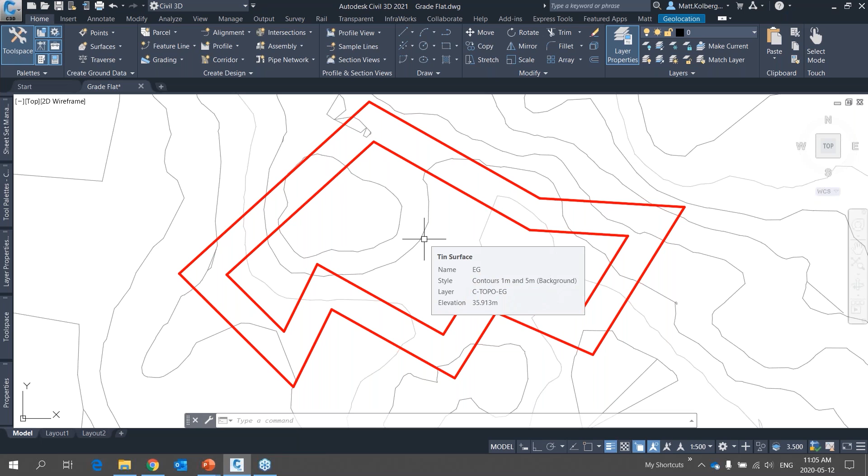But yes, thank you. Who was that, by the way? That was Len. Right on. Good job, Len. Yep, you could totally add points. One more? Actually, we don't have too many other questions at all. Okay, awesome, good. They're just riveted, right? Thanks, Colin. All right, let's move on.

Detention pond with a sloped bottom. So the deal is, there's our pond. Most of it's pretty simple. We have a grading object that goes down at, let's say 7 to 1, right there. Then it goes flat for a ways, and then it goes down at 2 to 1, and that's all fine, but this is not flat. It doesn't go down at 2 to 1 to some known elevation like 34.

We need to make sure that the water drains, in this case, to the north. So this bottom of our pond has to be sloped, as indicated there. I like to call this use of an interim surface. At the left image here, I've graded my flat area. I'm about to grade to the bottom of this sloped pond. So what I did was I created this surface, which is essentially a 1% slope in this direction.

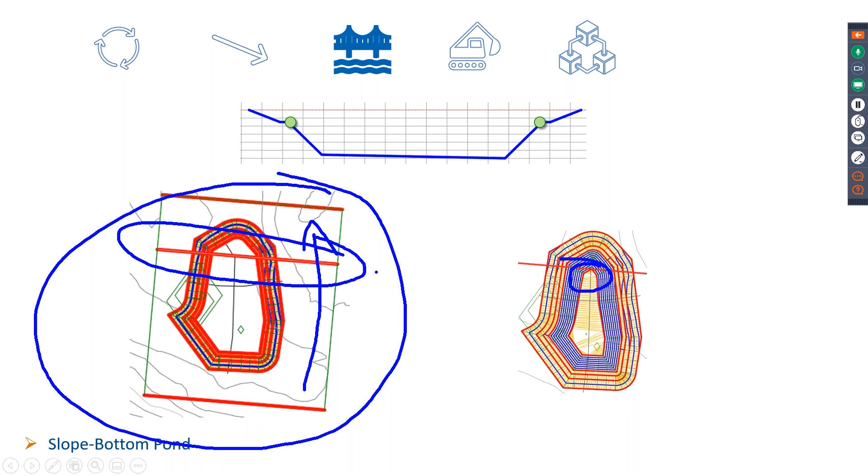How did I make that surface? Well, I did this first. That's just a feature line at some elevation, right? I have an elevation in mind. The bottom of my pond at this end has to be, let's call it 34.5. So that feature line is elevation 34.5. I graded to the north at -1% and to the south at +1%.

So right here is 34.5, but then it goes up at 1%. And I don't really care what the elevation is up here. I want to know that it goes up 1%. So any drainage will go down from here towards 34.5. So I have this flat plane at 1%, and it's a surface now, and it's a surface I can grade to.

I'm going to zoom in here. So from this feature line that goes around the pond at this level, I'm grading to my interim surface, which happens to be 1% that way.

Now, there's a couple of tricks to make this happen. We have feature lines crossing one another, and we talked about split points earlier today. When you have feature lines in the same site, they need to occupy the same elevation where they cross. And so I can't have that here. So that feature line has to be on its own site.

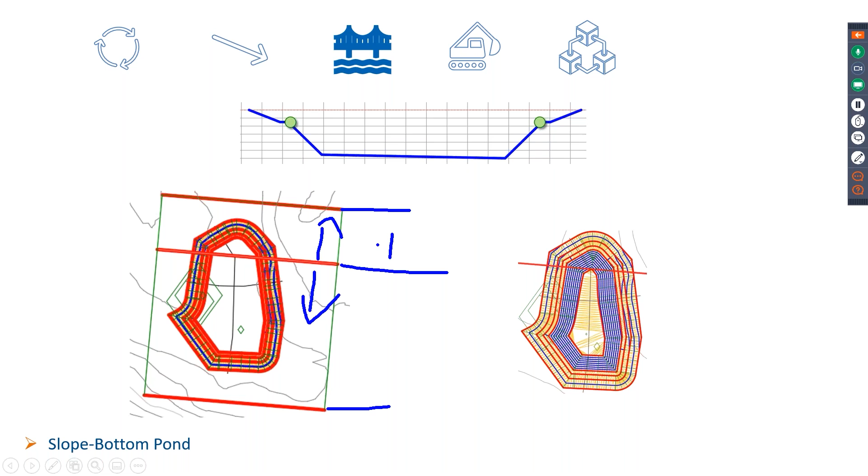Name it whatever you like. I called mine Interim, or maybe you call it Pond Bottom. That's your site name. I have 2 grading objects. Grading from that, just grade to some arbitrary distance. That distance there, that distance here, -1% to the north, +1% to the south. Turned that into a surface. Again, I called it Pond Bottom Surface. So essentially, I'm creating a surface that represents the bottom of the pond. And then I'm grading to it.

And that's essentially how you manage that. You have to have 2 different sites, because if you don't have 2 different sites, the feature lines will interact with each other, which is not what we want. And now you have a surface that you can grade to. So I don't really need to open the drawing for that one, just because it's really just an idea in this case.

You can use this for parking lots too, let's say. Maybe you've got a parking lot that's a funky shape, which I'll show a bit later. I can create, think of it as a flat plane. I would like all of my drainage to, let's say, come down here. So I'm going to design this flat plane so that that happens. And then when I do my parking lot, I just start adding feature lines, and good things happen. So you can make use of this interim surface, not just for ponds, but for parking lots and lots of other potential scenarios as well.

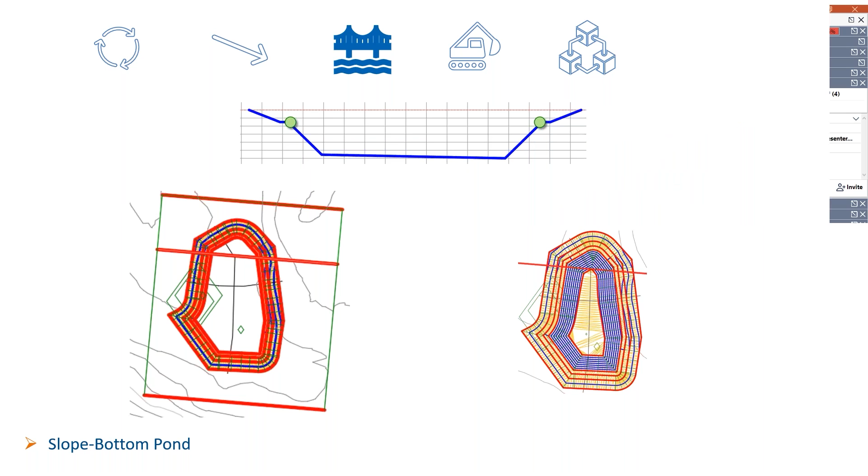Lot grading. All right, let me open a drawing for us. So the lot grading scenario, I've got a bunch of parcels set up. I have a corridor here as well. The best way to describe this technique is that we have what are essentially 2 fixed design areas here, right? The corridor is its own entity. It's being controlled by alignment and profile and assembly. It is what it is. It's not really part of the lot grading. I mean, it is, because where the corridor stops is the right-of-way edge, and that's where lot grading typically begins.

But we can use the corridor to sort of initiate our lot grading. And the way you do that is you extract feature lines from the corridor. Right? If this is my right side of the corridor and this is my property line, right there corresponds to the outside edge of your corridor, and that's a corridor feature line. But you can't use corridor feature lines as grading entities unless you extract them first. So I'm going to show you how to extract that. So we're going to have a corridor with an extracted feature line, which can be used for grading. So that really just takes care of your property line right-of-way edge, where your properties meet the corridor. That's all handled by the corridor itself.

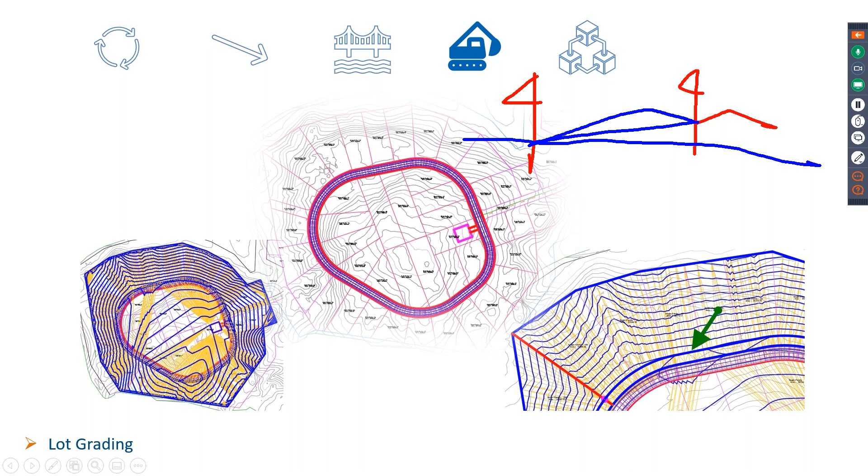So that part, because every lot grading scenario is different, and in fact, within the same subdivision, very, very often, you sort of have to look at each lot as its own individual entity, figure out how to grade each lot. So I'm not going to talk about that, but I will talk about dealing with these fixed entities, right? We've got this corridor and our outer feature line.

So as I mentioned, for the corridor, we need to extract the corridor feature line. Let me zoom in here. You'll see that they're red. They're inside the corridor already. They have not yet been extracted. Now the tool, once I select the corridor, is over in the ribbon.

It's called, where is it? There it is. Come on, tooltip. Anyway, that's the button. For whatever reason, it's not showing me the tooltip. It's called Feature Lines from Corridor. There it is. So I'm just going to start with the outside.

Now, when I hover on this feature line, that tooltip tells me the name of the feature line. Now, I called it PL just because it makes sense to me. You might see a feature line named hinge or back to sidewalk or whatever, but anyways, that's the one I want.

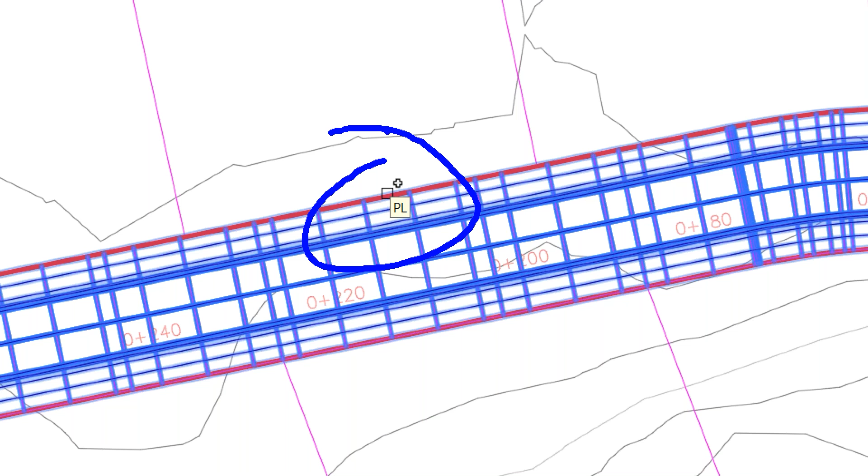Now, when you extract corridor feature lines, they will become dynamic only if you ask it to. So I need to go to settings. I need to make sure that the dynamic link is created. Do I want to apply smoothing? Not really. I want this feature line to be the same as the corridor. Do I want to name it? It's up to you. What code set style am I going to use? That doesn't really matter too much, but the dynamic link does.

I have some choice on styles and layers and sites. So, probably I put this on the appropriate lot grading site. And then if your corridor has multiple regions, this is a reasonably new tool. See, if you tried this 5 years ago, you'd have to do it a bunch of times, once for each region. But Autodesk added this tool recently. If you have multiple regions, it's going to attempt to join all your feature lines into one, which is great.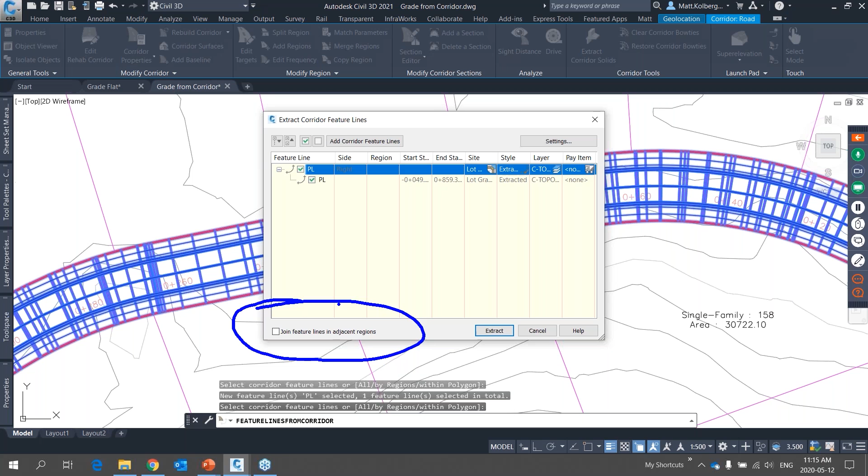Extract. Now we have a thicker blue feature line, and its object type is Auto Corridor Feature Line. Now I've got a big thick polyline around my site. Now I'm just going to turn that into a feature line as well. From objects. Same site, same style, assign elevations.

I would like to drape you onto my existing ground surface, making sure that I insert intermediate grade breakpoints so it drapes perfectly. Do I want it to be dynamically related to that surface? Not necessarily. All right, now I have two feature lines that are at the proper elevation. That one's draped on the ground. This one has been extracted from the corridor. All I need to do now is sort of figure out what to do along here. But right now I don't have a surface.

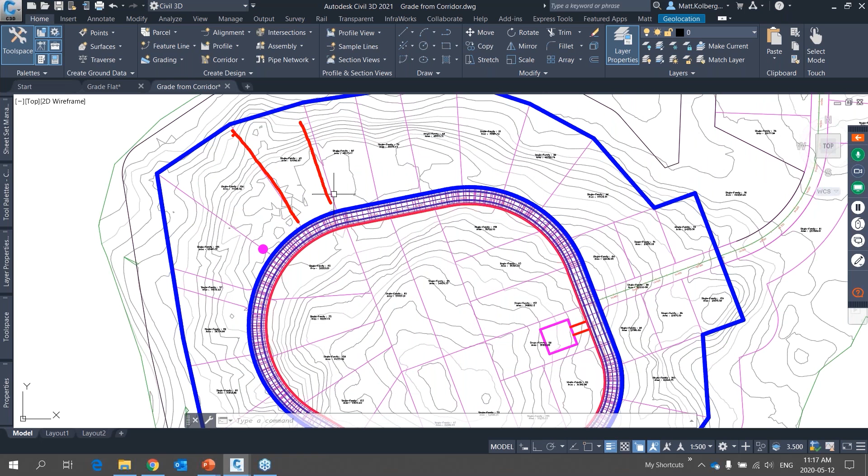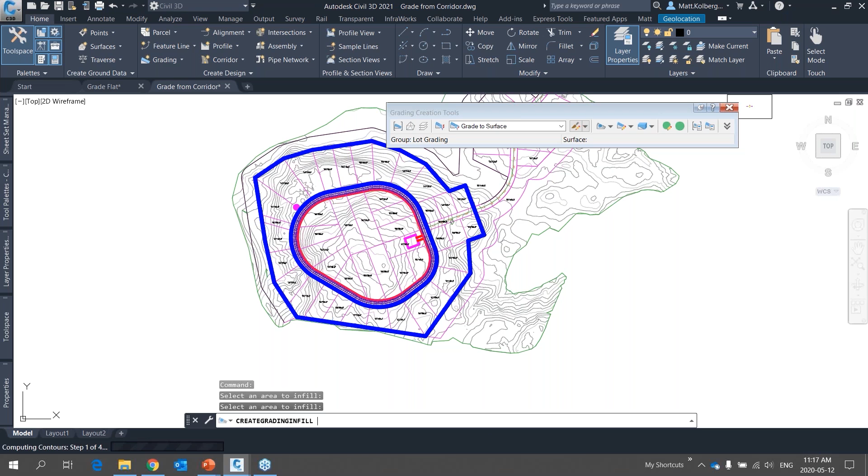I want a surface. I've got a grading group here created called lot grading. And because I have two closed feature lines, I can use the infill tool. I'm just going to do the outside. I'm not going to bother with the inside right now. There we are. Now this surface is just a straight line between the corridor and the feature line representing the outside of my site. The triangulation here is not very good. So I would then sort of force the triangles to do what I want. Other than that, it's reasonably normal contours.

And so if I wanted to create maybe a 2% grade going up and then down, I just start making feature lines along my parcel segments. Or here's another option. Maybe I want 2% all the way around for 10 meters. I've got some options. Maybe one of those options is just the stepped offset tool. So I'll start with this auto corridor feature line, and I will attempt to use the stepped offset tool.

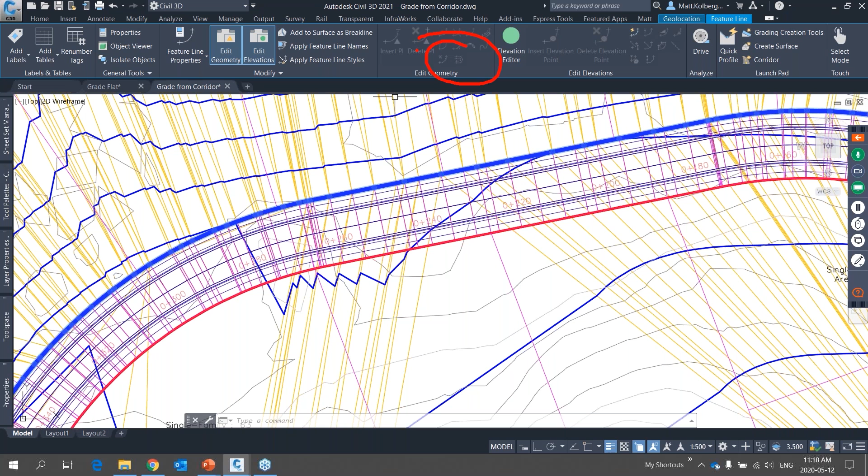And you might say, hey, it's disabled, right? I suppose because it's dynamically linked to the corridor, that tool is not available. Well, it's not available here. See, I love to select my objects in Civil 3D and use the contextual ribbon state, but that's not going to work for me. But I know that when I go Modify Feature Line, I can get straight to the stepped offset tool here. And for whatever reason, I can now pick that.

I'm gonna go 15 meters. I can pick that auto corridor feature line this way. So even though it doesn't work with the contextual ribbon, I can force it to work this way. Side offset, elevation difference, I don't know. Grade, 2%.

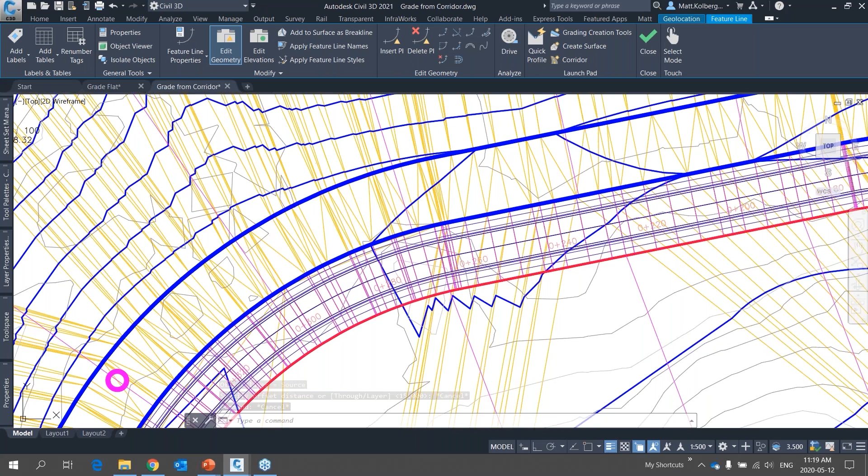All right. And guess what? Because I used the infill tool, that thing is now part of my surface. You can see the contours are exactly 2% from the back of the corridor to this newly offset line. And so from that, same deal, wherever your lot lines are, if you need something special to happen there, that's what you can do.

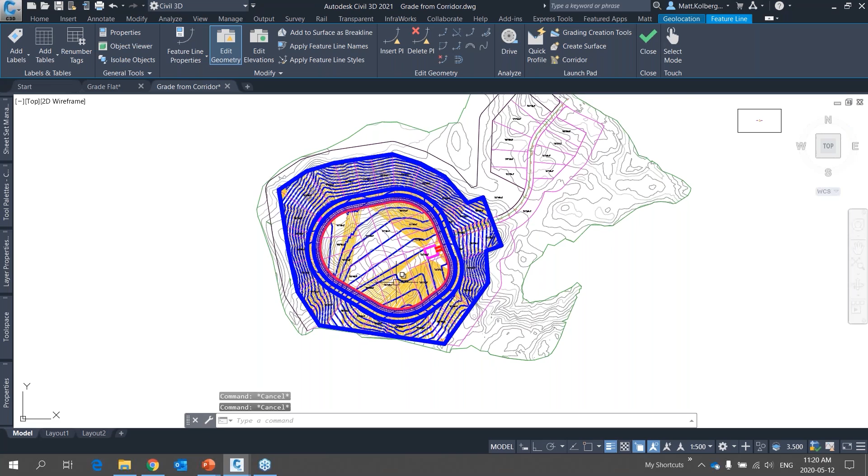So there's some options you can use to start your lot grading, right? Extracted corridor feature line, a draped feature line over your surface, an infill tool, and then in my case, just a stepped offset for my 2% grade all the way around. So we're clearly not finished, but that's a very good start.

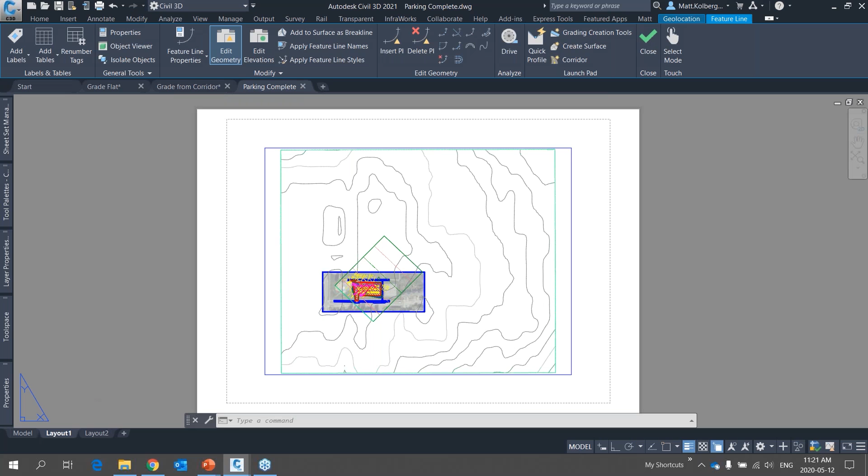Okay, finishing up, parking lot. All right, let's open this guy up real quick. So I'm gonna open the drawing that's actually complete, and I'll talk about what I did to make this happen. The data set I used for this is actually just down the street from my house. There's a park with a really small parking lot. It's sort of flattish. I thought it'd be a good example to use. So what I did was I went into InfraWorks and used the model builder to get me the existing ground surface and the orthophoto. And then I just sort of traced some of the objects, and this is what I had.

So here is how I tackled this scenario. Not too many steps, so let's just go through them. Step number one, this big, thick red feature line. I drew that around my site because that is sort of the limit of my parking lot. Right here, it had to tie into the surface in that area. So what elevations did I use? Well, surface, right? There's 3 or 4 points there. I just applied the surface elevation. Same thing here. Those are my 2 tie-in points.

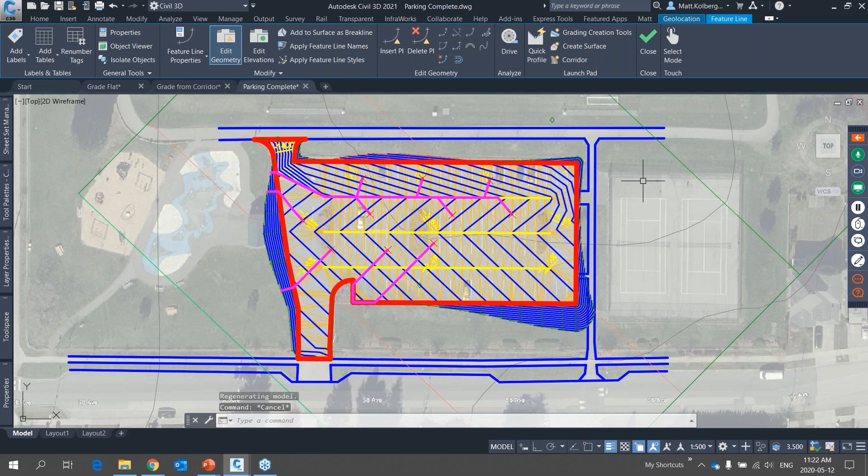But what about the rest? Well, when I was looking at the existing ground surface, I saw that the surface sort of sloped in this direction. And if you remember how I accomplished the sloped pond bottom earlier, I created what I called an interim surface. That's exactly what I did here. That right there is an interim surface in a different site at 2.4%, from the northeast to the southwest. That is my parking lot plane.

So I draped the red feature line over that 2.4% plane, and it was exactly 2.4% except in these 2 tie-in areas where I applied the surface elevation. Then from there I graded to the outside to give me my daylight line. So now we have something that's exactly 2.4% going from northeast to southwest. And now really all I've got to figure out is what I want to do inside the parking lot.

Now what I'm going to do, just so you can see something happen, I'm going to move these to the other site so you can see what happened before. I think I had one too many things picked. All right, move to site. Now I'll put those on the none site so you can see what things look like before. Need to rebuild my surface. All right, there we go. So you can see the contours are all perfectly parallel. That's my 2.4%, which essentially followed that plane.

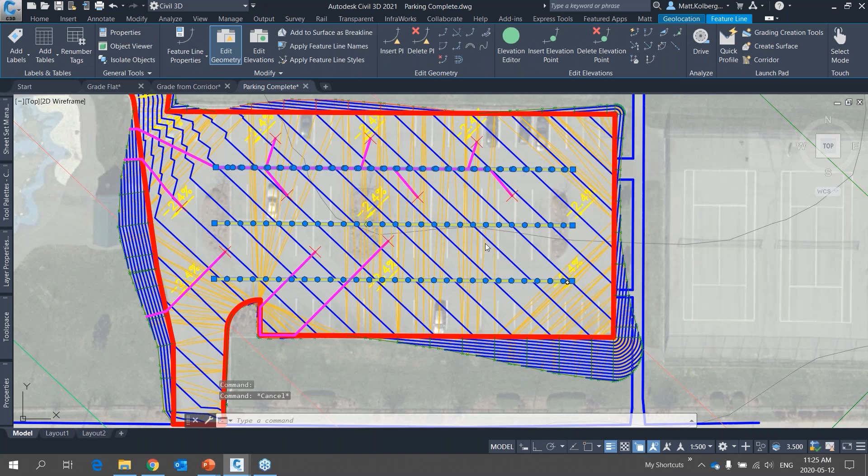So what I did was then I sort of lowered each of them by, I don't know, 2%, let's say. That one I lowered by 2%, that one I lowered by 2%. So I now have feature lines at appropriate elevations. And then when you finish everything up and you go add them to the parking lot site, good things happen. All right, add them to the site. And again, because there's an infill tool in there, they instantly become part of the site once I rebuild the surface. Now you probably notice my surface is set to rebuild automatically. Yeah, it is, but for whatever reason, I do need to force the surface to rebuild.

Now, the magenta lines that you see, that's my water drop tool. So I added a couple of drops here. I wanted to see if I designed this thing correctly, and sure enough, wherever I drop the water, it drains into here. That's my driving aisle. Water drains, goes north, and then it follows the curb and it goes out. On the south side, there's 1, 2, 3 water drops, and they also drain.

Now, you'll notice that it drains over the red line because I didn't add the curb yet. So right now, the red line is just edge of pavement, and it drains off. Normally, I would grade a whole curb there as well. One other thing you might notice right here is a low point. What do? Well, it depends.

Do I want to create a catch basin here and then a storm sewer that goes out into the road? Or do I in fact want to just drain the water this way? Or maybe, because putting a catch basin and a pipe is going to be more expensive than just putting a little channel of curb right here too.

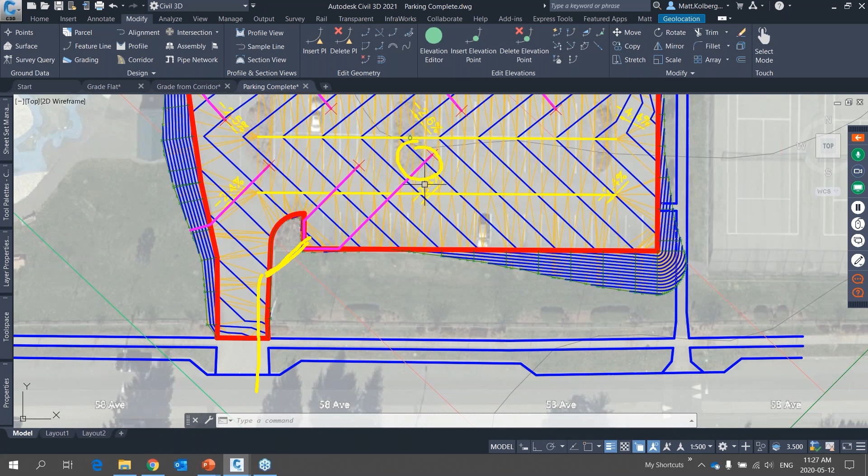That's another option. But doing it this way and using the water drop tool shows me where the low points are. And so maybe the water comes out here and there's another catch basin that's already there. So where you go from here is up to you.

And so to recap this one, what did I do? I have this 2.4% plane over which I draped all these feature lines, assigned surface elevations where necessary, graded to the surface on the outside, and then adjusted my drive aisles accordingly, up or down, depending on what I needed to do. With the use of an infill tool, it makes parking lot design not easy, but definitely easier than not.

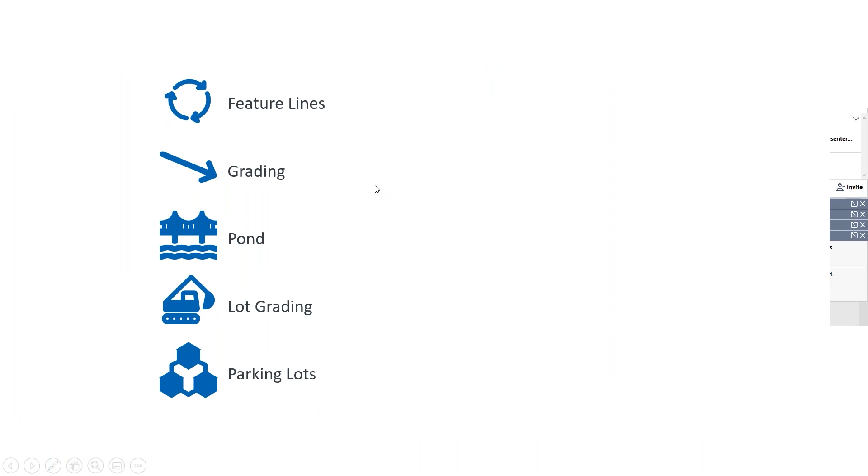And so what did we cover today? We started with feature line editing tools. Geometry first, elevations next. Then we talked about grading criteria. Do you want to just stick with the 4, or do you want to have some preset values? We talked about tips and tricks for ponds, lot grading, and we just saw parking lots. So that's what we talked about today.